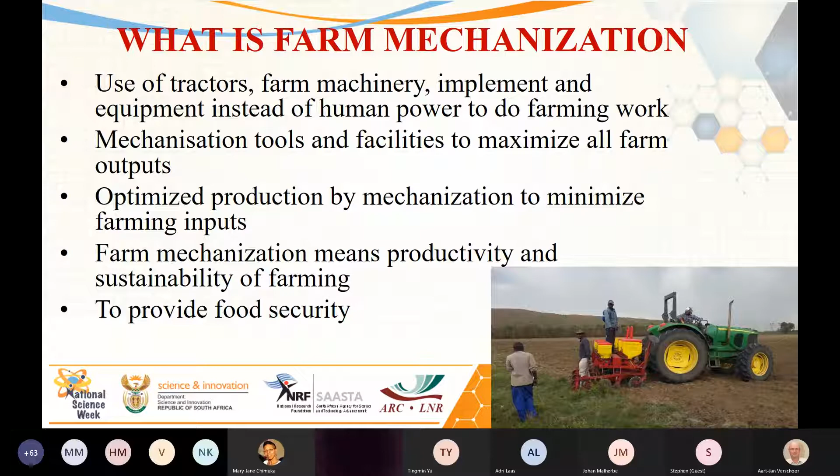If we look at the whole picture of crop production, mechanization definitely is playing a very crucial role over the whole agricultural value chain, right from soil preparation, planting, fertilizer application, weed control, up to harvesting, even post-harvesting. All these steps have an involvement of mechanization. So mechanization can provide a lot of solutions to promote crop production.

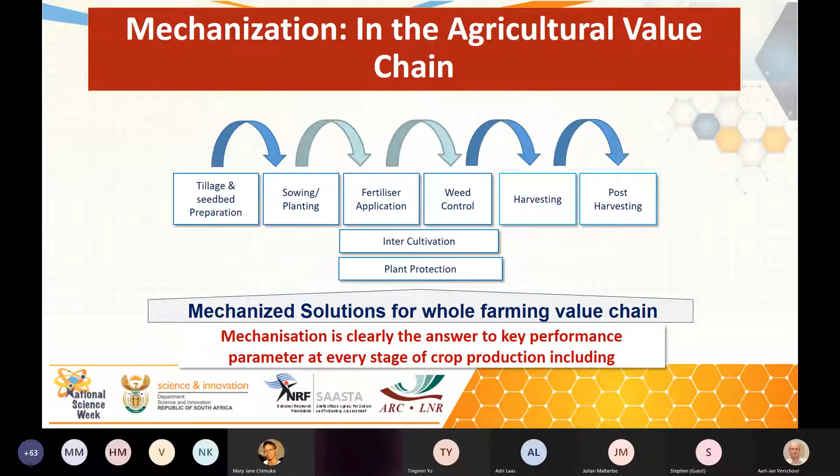Okay, the most important part of mechanization is the tractor. Briefly, the tractor can be categorized with a lot of different definitions and terminologies. But most popularly, we categorize tractors according to traction system or power and size. If we talk about traction system, we have a crawler tractor and a wheel tractor. According to power and size, we have very tiny, small tractors. We can also make use of very big tractors, more than 200, 300 kilowatts.

And the important implement to work together with the tractor, the first step when we start working in the field, is soil tillage. There are heavy duty soil tillage tools. They can perform deep cutting and thoroughly overturn the soil. That is what we call a primary tillage implement. Typically, we have a moldboard plow and a disc plow. Remember, they are working at a very heavy duty. They can totally overturn the soil.

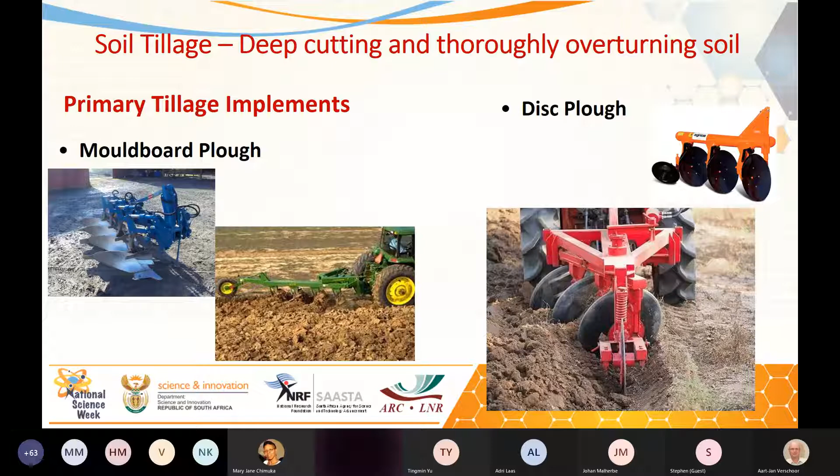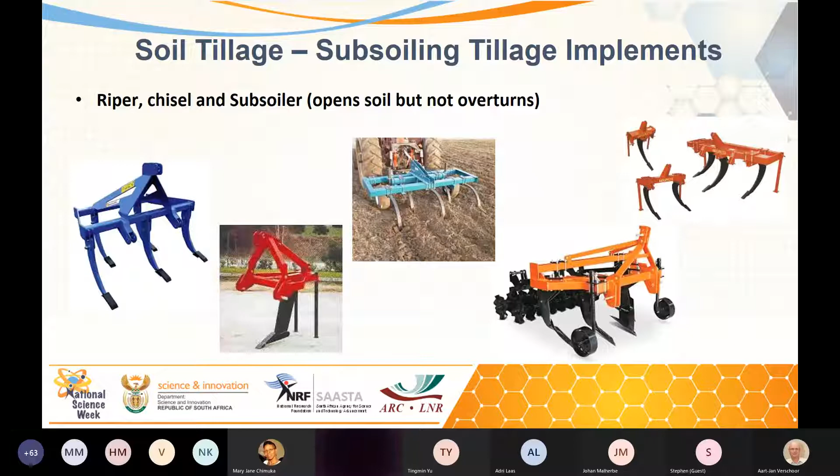Another type of soil tillage is the subsoiling implement. These kinds of implements work quite deeply, but they only open the soil, not overturn it. In this case, they can break up the plow pan inside the soil, but they don't waste a lot of energy because they don't overturn the soil.

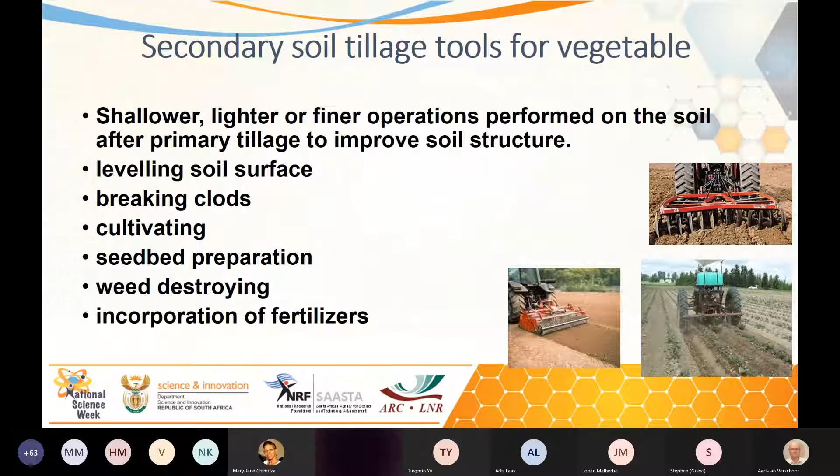Light duty soil tillage tools are used for secondary soil tillage. These tools are usually much lighter and use less power and energy. They also work a shallower layer of the soil. They are usually used for light duty work like leveling the soil surface, breaking clods, cultivating, seedbed preparation, weed destroying, and sometimes incorporation of fertilizer.

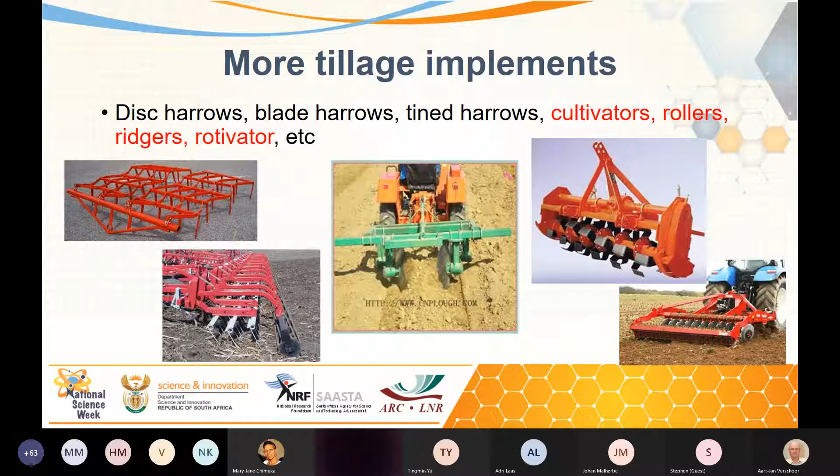And there are other tillage implements, and especially in the case of vegetable production, we use a lot of light duty implements to do finer work, like cultivators, rollers, ridgers, and rotavators. All these prepare the last step of the soil before planting.

Then planters are important for vegetable production and other crop production. We all know vegetables have very funny, strange shapes of seeds as well. Some are very fine, some have big cores, and some need to be planted as seeds and later transplanted, and some need different shapes of the soil surface. That's why we have these planter machines to plant on ridges, to sow seeds directly, and after seedling, we use this implement to do seedling transplanting.

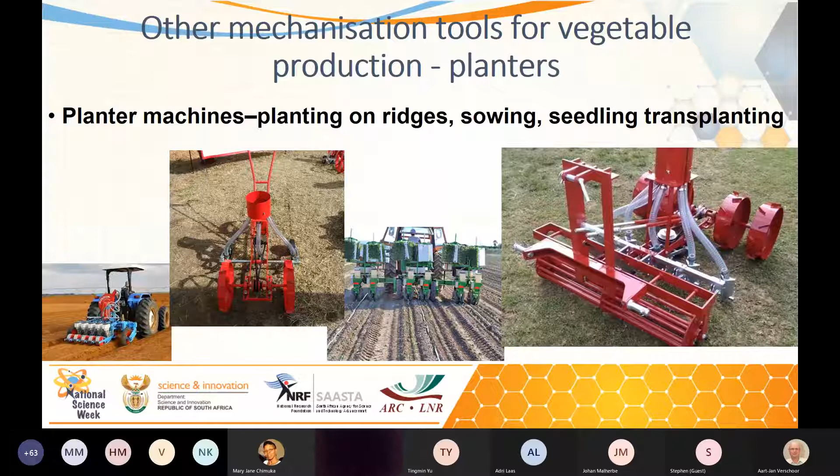And after a long or short time of growth, we will have the vegetables to be harvested. That's why the harvesting machine is another kind of mechanization tool we use for vegetable crop production, especially special kinds of machinery to harvest leafy vegetables and tuber vegetables.

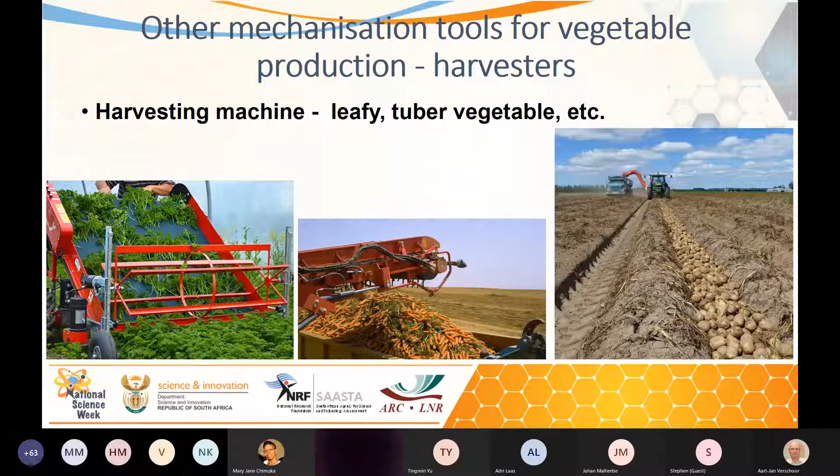Okay, in the mechanization sector, we are currently having remarkable trends. The first one I summarize here is the development of tractors and mechanization tools for special crop production. We all know now our farming industry has grown into quite a wide range. We see vertical farming, urban farming, and horticultural farming more and more.

And we are also facing challenges from the requirement for conservation farming and to deal with climate change. That means we need to minimize our tillage and reduce operations in the field. And also, by using modern technologies, we are having a migration from traditional agricultural mechanization to precision agriculture and automation.

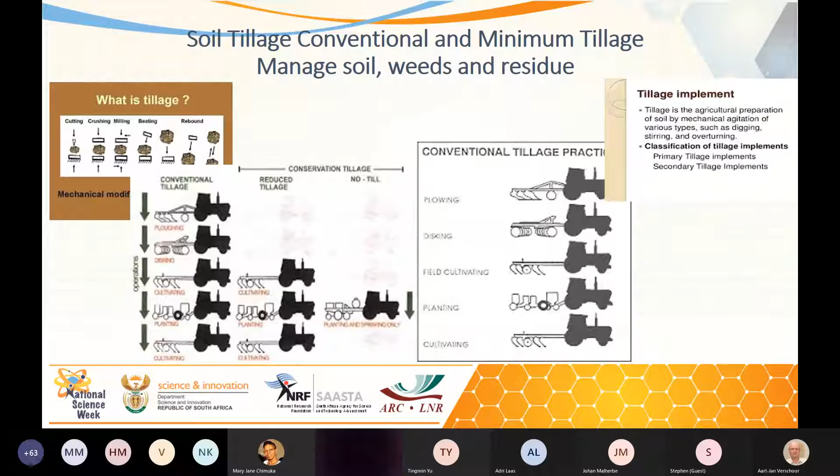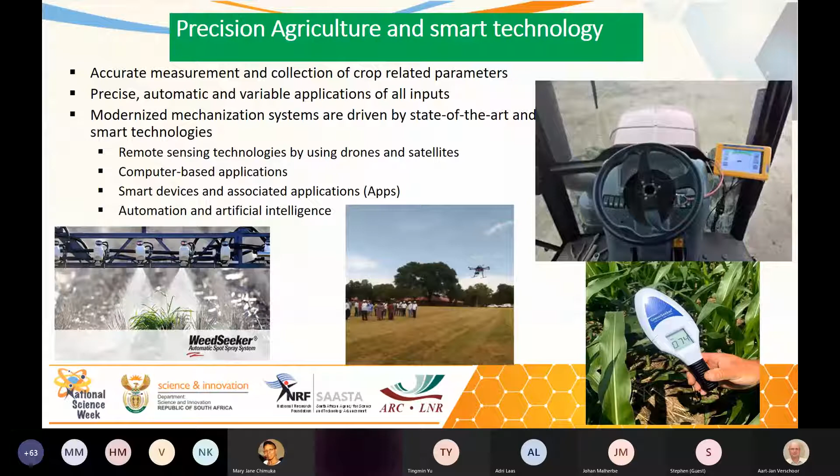Precision agriculture and smart technologies: when we apply agricultural practices more and more precisely, we need to use more and more smart technologies. They are based on computer-based applications and smart devices we use in our daily life. One of the precision tools we are developing is the application of drones. With drones, we can do surveying, mapping, monitoring, imagery, analyzing, and application of fertilizers by spraying.

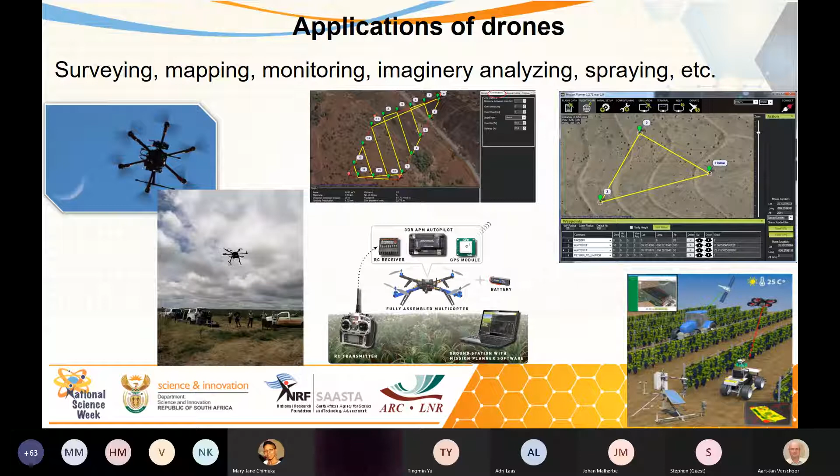Okay, all in all, regarding mechanization for crop production and vegetable production, mechanization is crucial for farming because it can remove farm drudgery and increase productivity and efficiency. It can also help us save time, reduce cost, and increase income. It contributes to improving livelihood and food security for population growth.

But we also see vegetable farming is similar to other crop production in terms of mechanization requirements, but it needs a lot of special attention for special implements and tools. And in future, we see huge potential to use modern technology to improve our farming mechanization and automation.